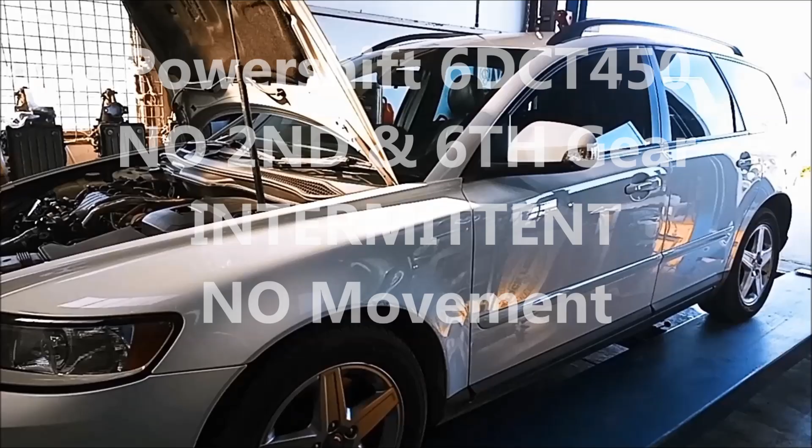G'day. Today we're doing a bit of work on a V50 Volvo 2010. Got the 6DCT450 transmission in it. Now there's issues with it.

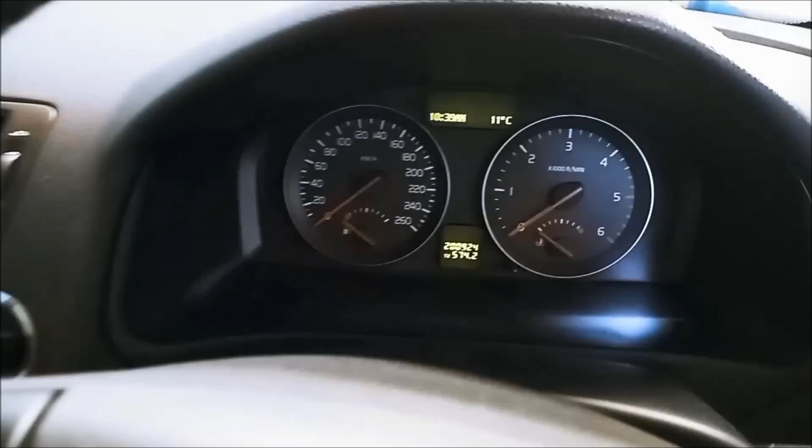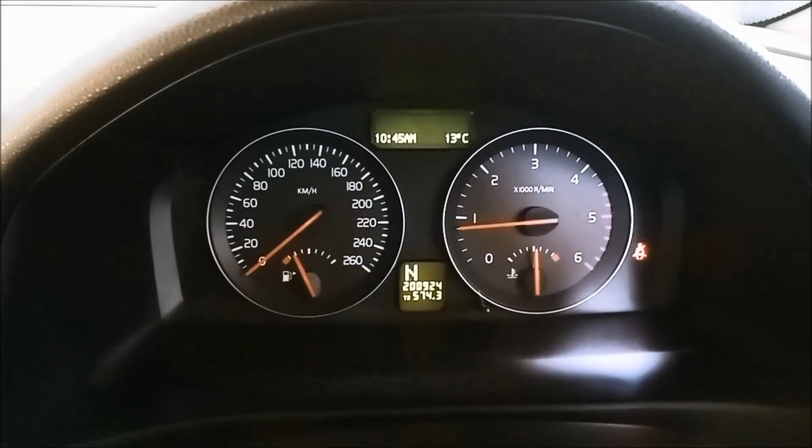It's going into neutral, neutralizing completely in all gears, including reverse. Seems to be better when it warms up. I've just had it out for a test run, and what I've noticed, manually selecting the gears, it's jumping second gear, going first to third, and there's no sixth gear. Also, sometimes if you give the selector a bit of a jiggle, it won't start in neutral. So I reckon the range sensor's probably contaminated as well. The limited function light comes on - it's gone now, but if you jiggle it through and get it to start in neutral, the light disappears. There's definitely an issue there.

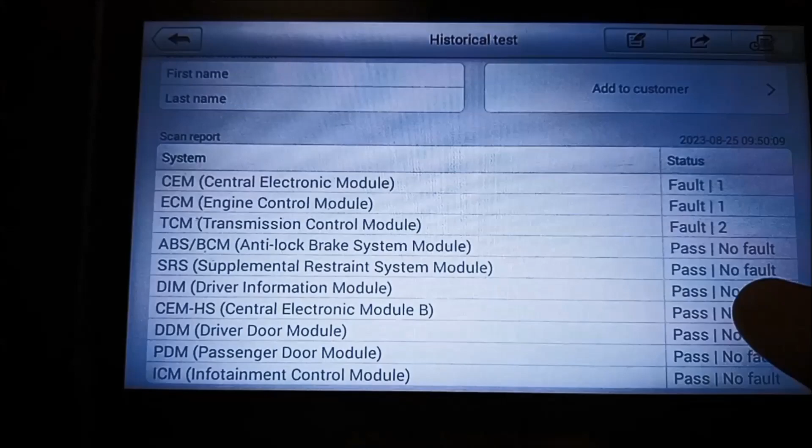And the scan there shows quite a few faults, six faults there. The multiplex solenoid has an intermittent fault. When it's intermittent, it can be heat related, it can also be contamination related. And it's jumping second gear and not going into top gear, or sixth.

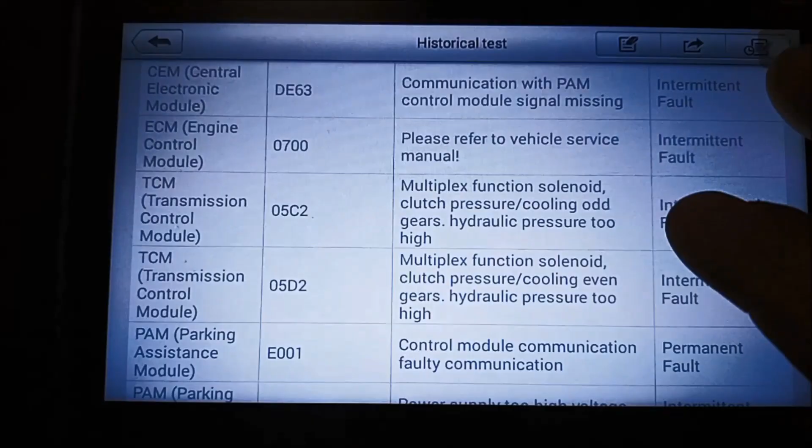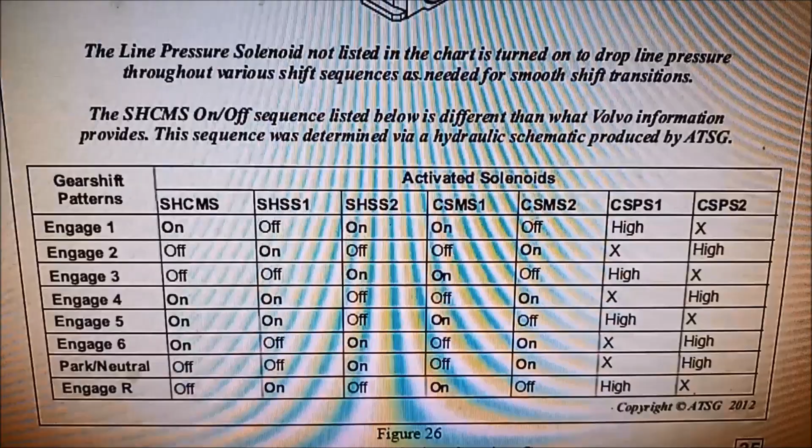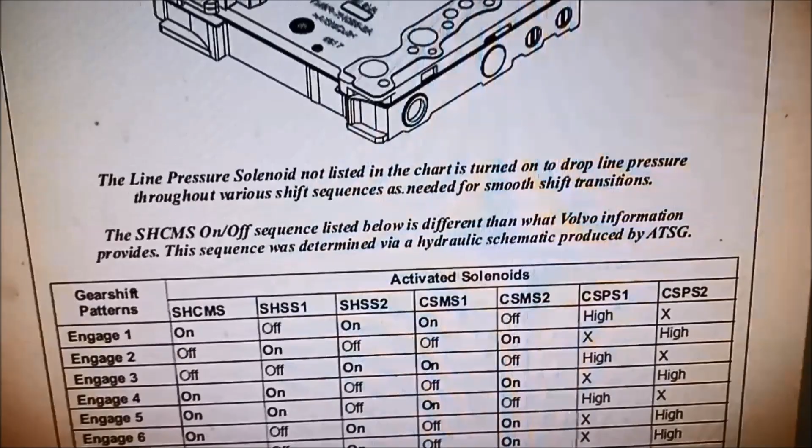So here we're on the ATSG manual for this. If we have a look down here, in second and sixth gear, we have two solenoids that are coming on, and one that's coming on high, and that's the CSMS2, or the clutch shift multiplex solenoid 2, and the CSPS2, the clutch shift pressure solenoid 2. They operate on even gears, which is what we've got, second and sixth. We've basically got two solenoids there, this one here and that one there that is playing up.

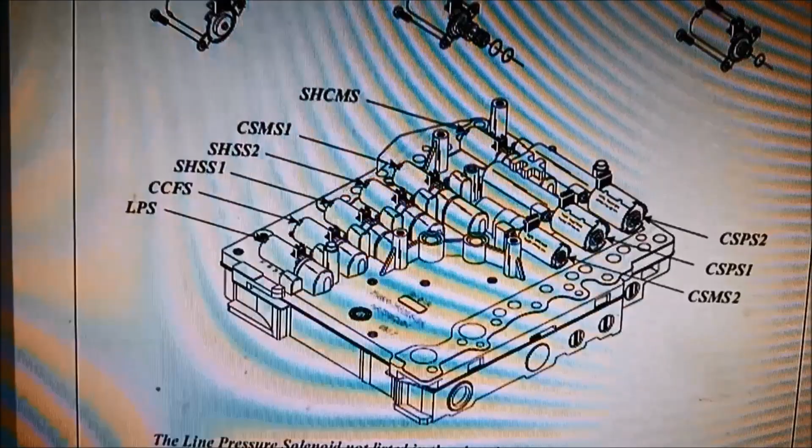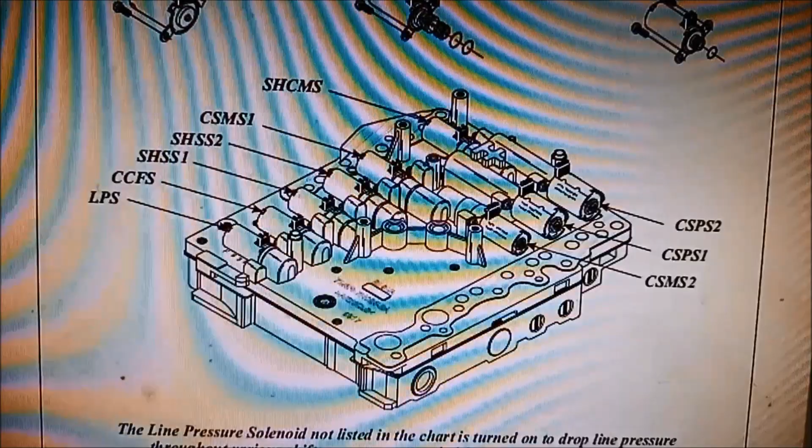So it's always a good idea to check as many solenoids as you can. If you're going to re-flush them out or demagnetize them, flush them out, test them, and make sure you warm them up as well - not with a heat gun. We have a little thermostatically controlled oven. You can put them in a plastic bag and warm them up in hot water, but a heat gun can sometimes damage the plastics on the solenoid. It's a good idea to warm them up to probably about 60 degrees and test, making sure the resistances are within spec.

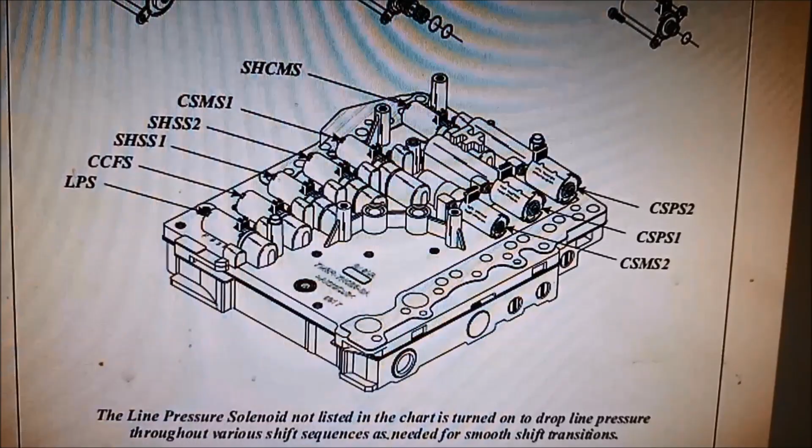Another issue with testing these solenoids is they don't operate only off voltage, they operate off varying the amperage, so that's another thing you have to keep in mind. But they definitely get contaminated, and internally they wear out as well. A leaking solenoid will not give you a fault code, but it'll give you issues. Generally, the computer can only sense an electrical fault if it's outside the parameters that have been set inside the computer there.

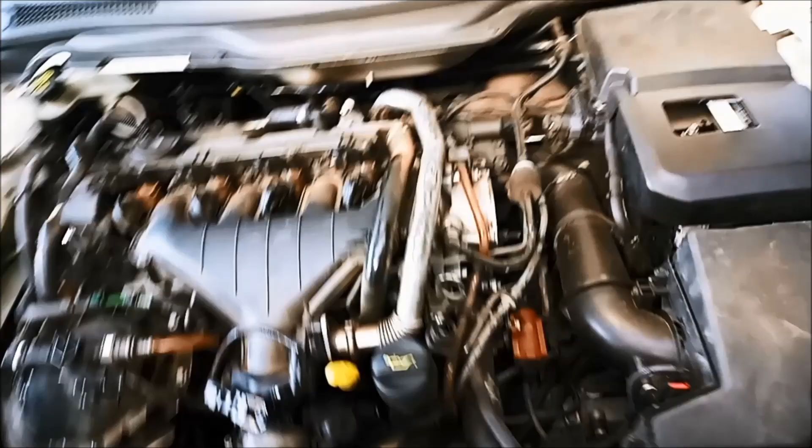So there are a few basic checks you need to do before you start any work on this. You can find that in the link I'll put in the description. Check that out. But we'll just drain the oil on this one and see if there are any bits of plastic in there. If there are any tiny bits of plastic, then it's not worth doing the solenoids or the range sensor - you need to pull the transmission out.

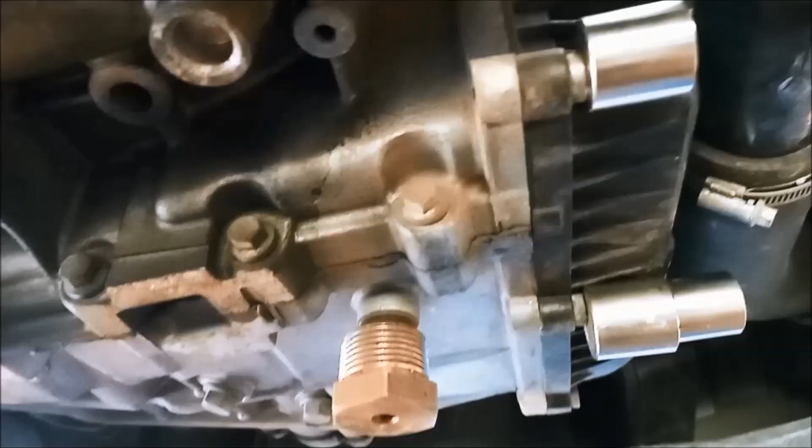Now another thing I didn't mention - we removed the cover on it and put a whole heap of magnets on it just to try and catch as much rubbish as it can before we start working on it. These are very strong neodymium magnets, very dangerous. Now just make a note, don't touch these plugs here, just the drain plugs, this one and this one.

So we'll do the rear one first, and we've got a little filter there that we're going to strain the oil through just to see if it catches any bits of plastic in there. These transmissions have different sections, that's why it's got a plug up here at the front and one at the back there.

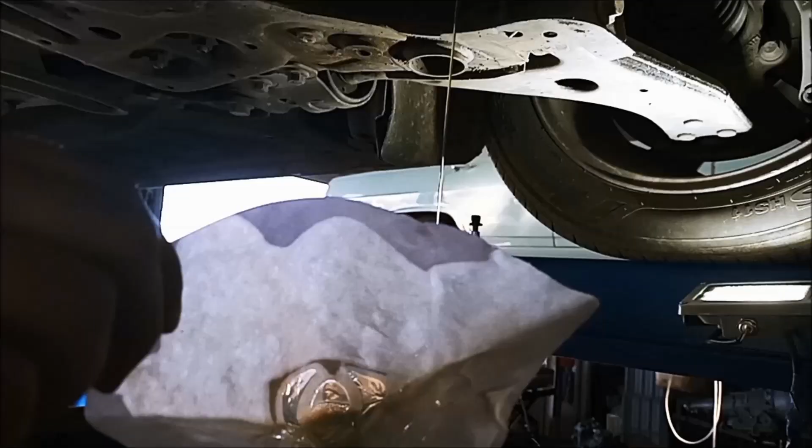So we've got no bits and pieces in the rear section there. You can see it's pretty clean. The oil's actually pretty clean too. And we'll do the same with the front section.

Let's have a peek at that one. Any bits in there? Oh, looks clean as well. So this job would warrant pulling the front cover off and replacing the solenoids and possibly the range sensor.

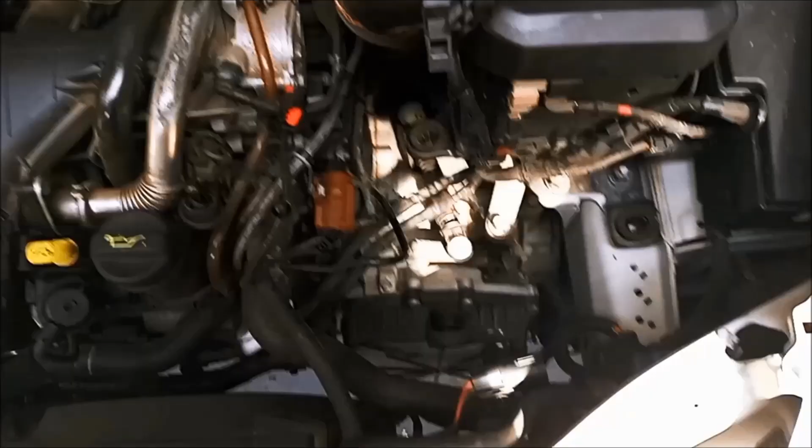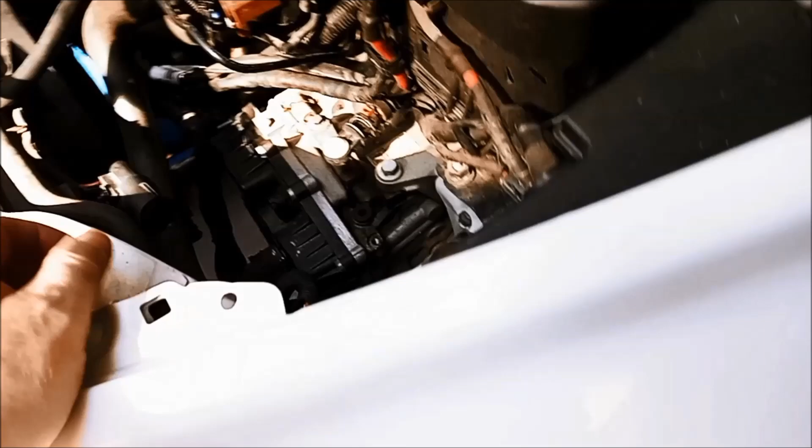So we're going to remove the front cover. We've removed the airbox, the plugs, the loom clips, just so you can move it. We've moved the thermo fan just to the side a little bit, up and to the side. And the big hose that goes from the intercooler along the bottom, and along the front of that cover there, will just be in your way. You can see that loom, we can just wire it up out of the way, like there.

We've probably got about 6 inches there, maybe 7, and we may have to pull the thermo fan right out if we can't get that valve body out. We've lifted it up probably a couple of inches and moved it to the right hand side of the vehicle, driver's side.

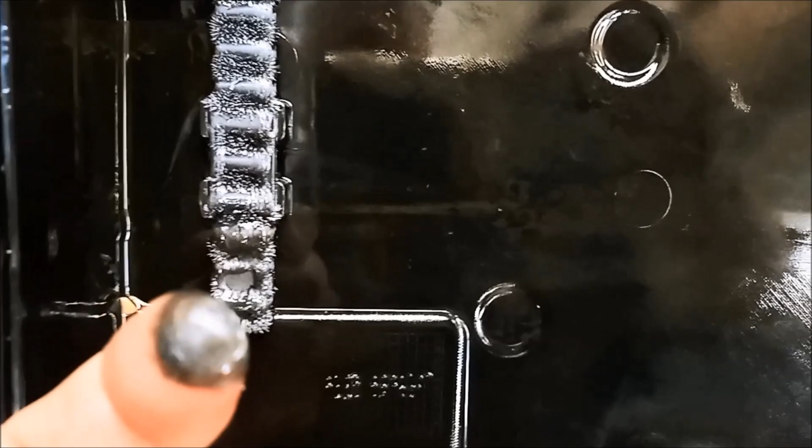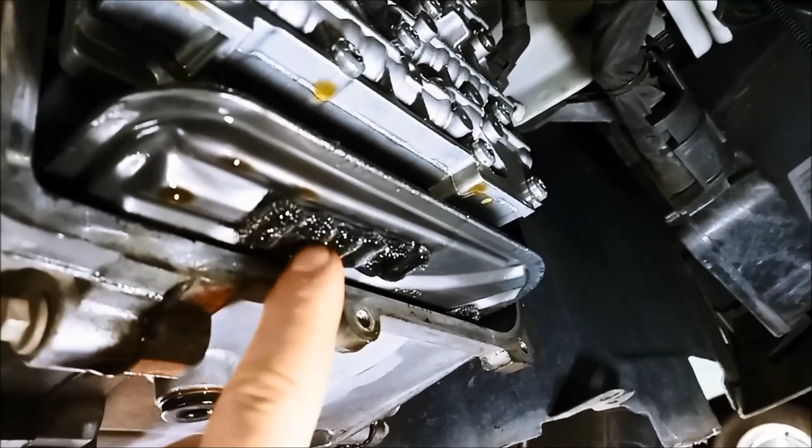There you go, you see the cover's off. You can see the magnet that's on the cover. All that stuff there will be stuck in the solenoids and on the sensors. You can see there's one on the filter there, and there's another one over here. Can't really see it, but they're thoroughly covered in that muck as well. Once the magnet becomes covered like that, it can't work anymore.

So the next place that's going to end up is on your solenoids, on the back side of the valve body. So we'll just take that valve body out. The top 4 bolts on the left hand side of the vehicle, and all these ones down the right hand side, and then you'll be able to slide that out. Don't forget the range sensor up there as well.

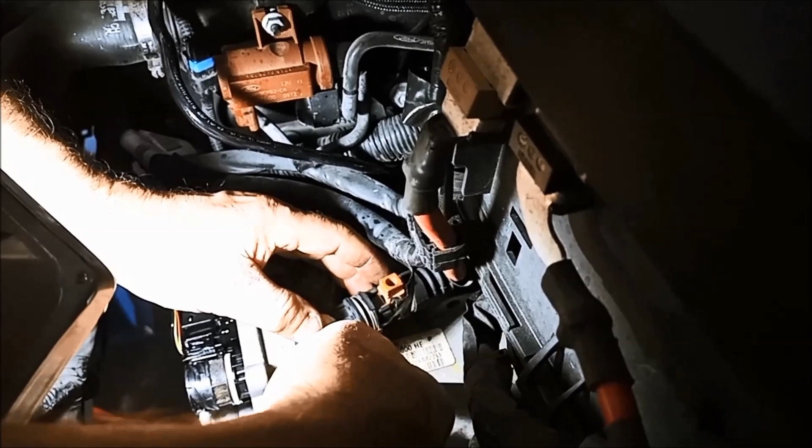There's a couple of bolts on there and the plug, and there's also a pin that you need to pull out. To get this off, you've got to push this little spring-loaded thing there, lift that little plastic bit off, up, and then you can get a screwdriver and just pop it off, and it'll just pop off the little selector there.

So now we're just aligning that little tool that we made in another video. What we need to do is select drive. So we're in park, reverse, neutral, drive. And if you watch the other video, you'll notice there's a little cam like that, and a little spring loaded bit just to keep the teeth on tension.

So what that means is when you push this in, you just need to - a little bit hard to see, not much room - flex that without going out of gear. So you just need to flex without going into the next notch. Just flex it just so you can get that tool in.

There we go, and that's just dropped down. I know we're in the right position there. So now I'll just mark where the D position is, so I know when I'm reassembling it, it'll go back in the right spot. Like I mentioned, sometimes it has to line up with the D, and sometimes it's one notch past the D, depending on the vehicle.

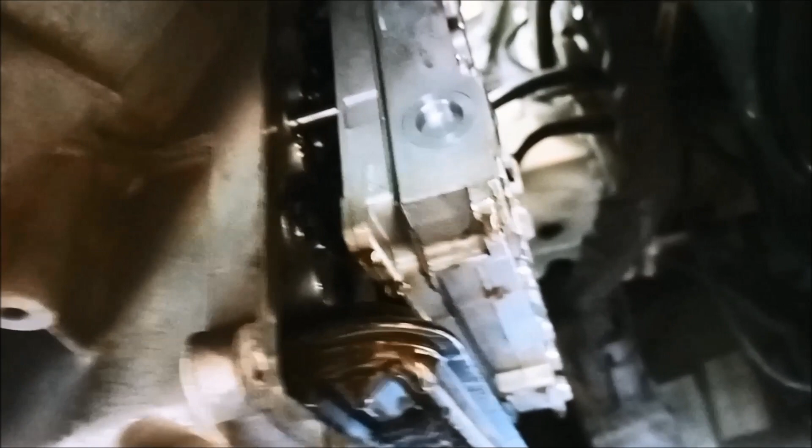Now we've taken the top 4 bolts on the left hand side of the vehicle off, that are down the side, the top 4 down that side, and all the ones from the top to the bottom on the right hand side. Sometimes you need to just pry it - just make sure you don't damage anything, and make sure you've removed those 2 bolts on that range sensor or you'll damage the range sensor.

Just let that drain out a little bit and then we can just slide it off, and it's located on 2 guide pins. There we go, so you can get it out.

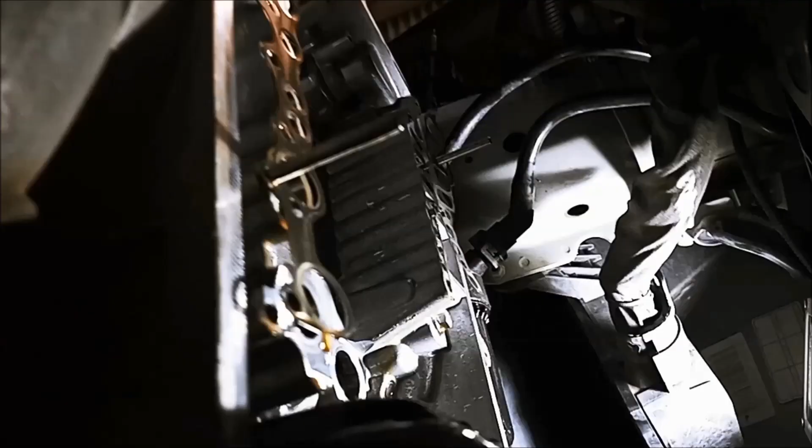It is a tight fit, especially with the loom, but if you've got an assistant or a bit of wire, you can just tie that loom out of the way a bit, or you can undo that bolt there and this little box will just move to the side as well, and then that loom will be able to move out of the way a bit.

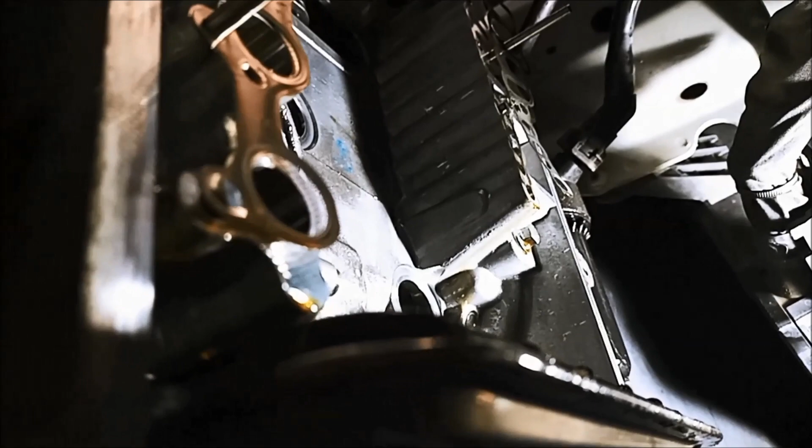You can see the 2 guide pins, and you can also see these metal gaskets there. It's a little hard to see from here. I'll see if I can hold it in there, but where those little sensors are, there's a little shift fork. You'll see that the shift forks are thoroughly covered in that fine metallic debris, like on that magnet there.

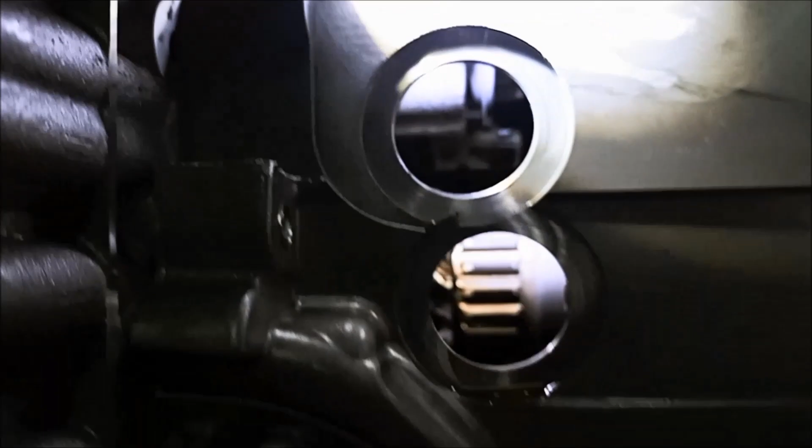So you can see that one there, there's a little fork there. There's one in there, a bit hard to see. There, and then down through here. You see that little plastic end there, and there's another one over in here. So they all need to be cleaned. You can just blow them out.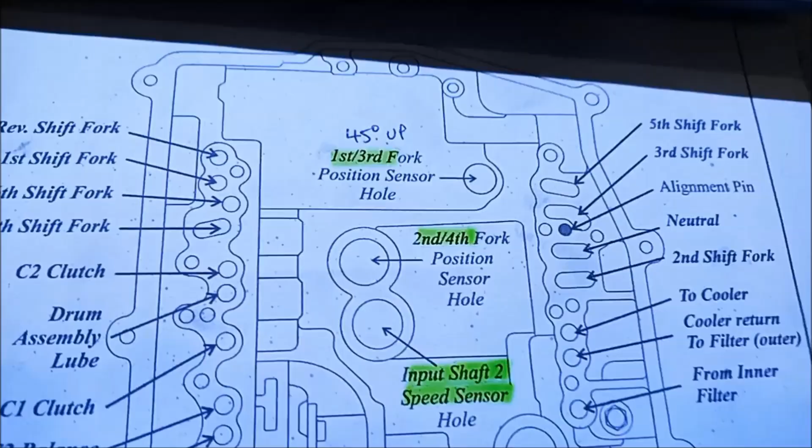And here we are on the ATSG manual. I've just marked they're about 45 degrees. If you look up, you'll see them: the 1-3 fork position sensor, the 2-4, the input shaft 2 speed sensor, the output shaft 2 speed sensor, and it's also got the 6th and neutral fork and the 5th and reverse fork.

So it's a good idea to get in there and just blow it out with air. Just blow it, and you'll see there's all metallic fuzz on those sensors.

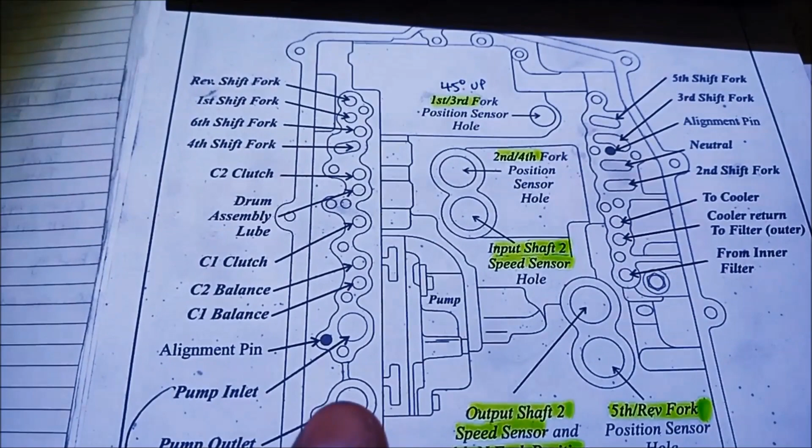Another thing you can do - you can check out this video here on the pump inlet - you can push a hose in there and just pump oil through there, making sure it's DCT oil. Blowing it with air won't clean that as effectively; you need some sort of medium to actually carry the rubbish out, so oil's probably the best idea. It'll also reverse flush the filter that's located at the bottom here, along here.

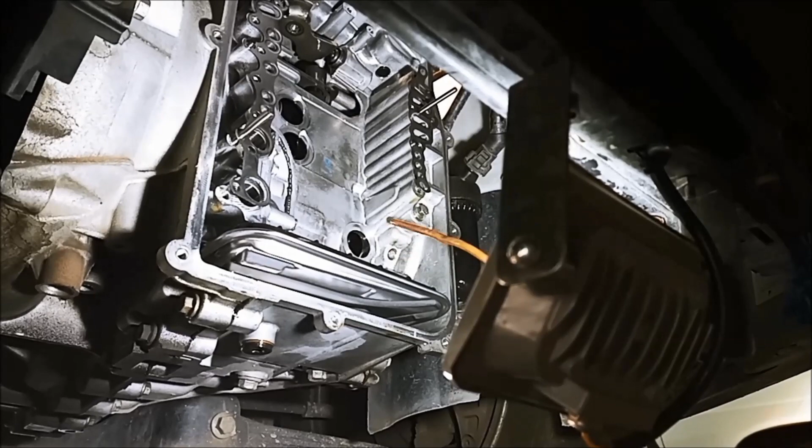So we'll just blow those sensors out best as we can. This bottom one's pointing... got it back in.

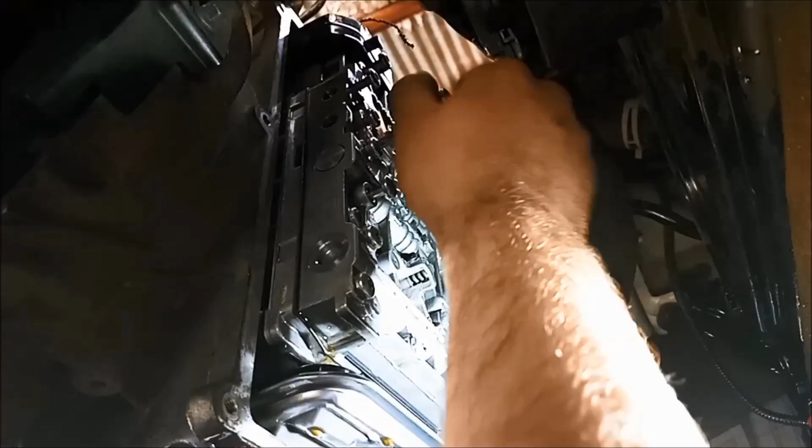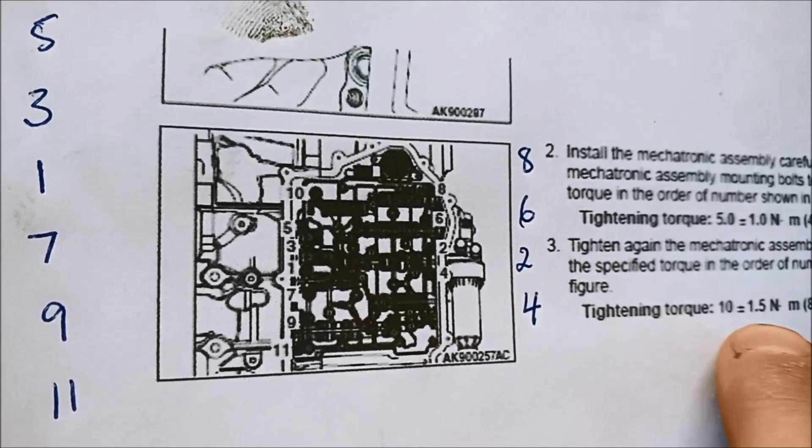Place the gaskets, solenoids, and there is a sequence of tightening that - 5 Newton metre to start with. You can see those numbers there, but I've put them on the sheet there: 1, 2, 3, 4, 5, 6, 7, 8, 9, 10, 11. In that sequence, you want to try and get it tightened up evenly, sort of like a head, and don't over torque them. Start off with 5 Newton metre and then final torque of 10 to 11.5 Newton metre. If you put a new gasket on, you can go 10. If you reuse your old gaskets, go a little bit extra.

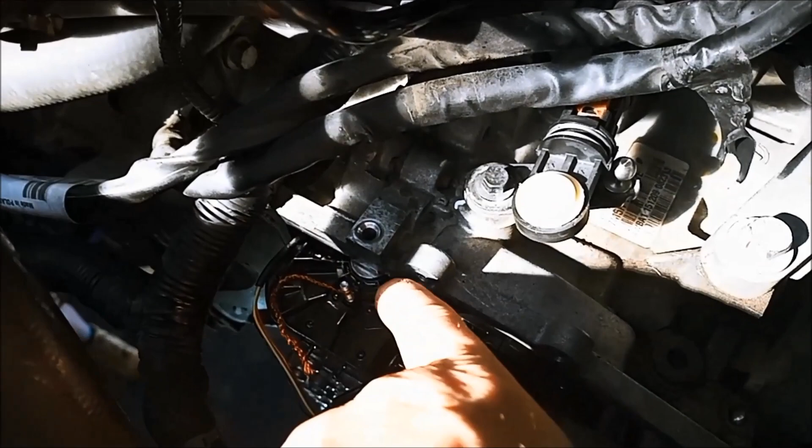And now hopefully your little tool there hasn't fallen out. It's still on the same mark there - see the liquid paper mark. And now we can put the pin back in.

And that goes through the range sensor. Now sometimes you have to just, because those pins are precision fit, you need to let it sort of find its own way through. Don't force it through, and definitely don't tap it through with a hammer or something like that.

After you've got it all back together, just reconfirm that the position is the same and your little pinhole is lined up. Bolts are back in, weave that little cable there. Make sure you push the plug in until you hear the click, then try and pull it out.

That's all good. And you should be able to feel that little step of that going through just when you flex the selector there. So you can pull it out a tiny bit, probably about 1 mil, and then you should be able to feel it go on that little spring steel tensioner that sort of keeps the teeth in mesh. If you don't line that up properly, then it's not going to work properly.

Once you're happy with how that's all aligned, you might notice that I've got this little bit of wire there, and I deliberately have that on there. The reason being is that you don't want to put that cover on while that's still in there. Don't ask me how I know that, but that's why I've left that wire on there, so it gives you an indicator that you've forgotten to pull that pin out. So you can pull that out now.

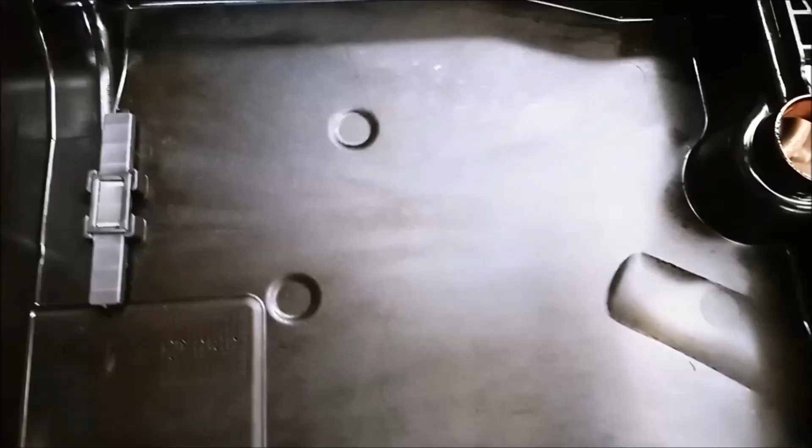Pan's all nice and clean, or the front cover, magnets all nice and clean. Smear a little bit of oil or assembly gel on there just so it goes over that plug a little bit easier. So we've got the intercooler pipe back on. Make sure you do the clamp up that's under there. Covers back on. Drain plugs are tightened up.

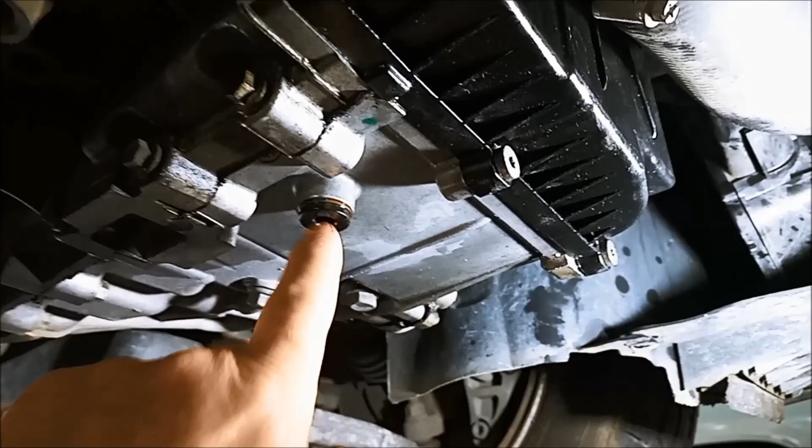We've replaced the cartridge and the cartridge housing on the cooling line, the external filter. The internal filter we've reverse flushed through that port I showed. Covers all on. Selector back into park. That just clicks on like that. Push that little red tang down like that. There we go, done.

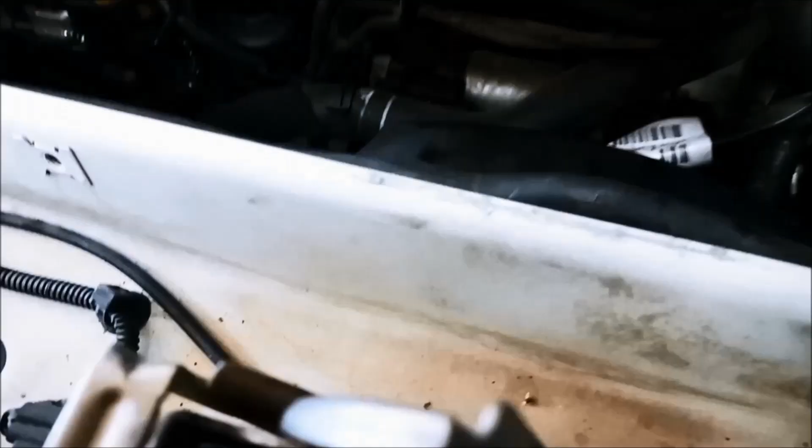Put these hoses back on over here. And the air box, we're going to fill it through here, and we're going to start with about 5.5 litres.

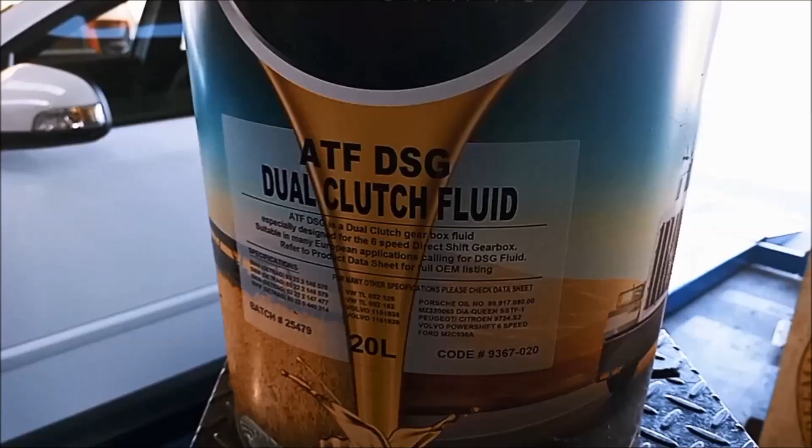And we're putting some Tritech brand DSG or DCT fluid. You can see it suits the Volvo Powershift 6-speed as well as the Ford, BMW, Peugeot, etc, Porsche even. Or you can also use the Penrite here in Australia, they have an equivalent.

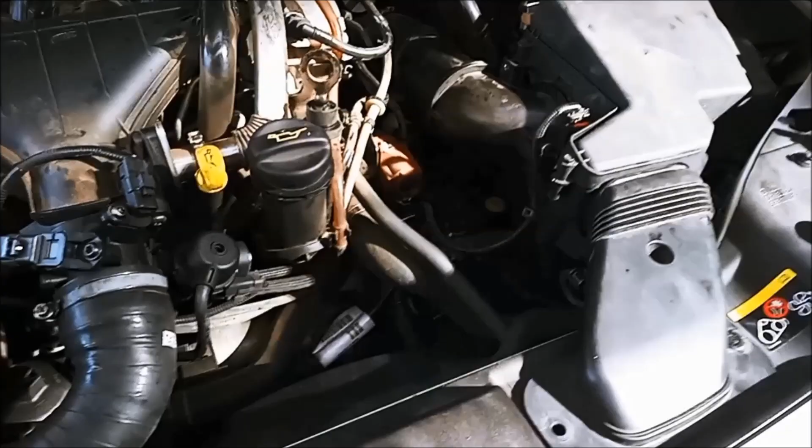Airbox back on, all the plugs are in, we've filled it up. We might need to take this airbox off again just to top it up, just check the oil level. 5.5, 6 litres should be enough, but there's a little plug just next to the axle there on the left hand side of the vehicle.

Rightio, start it. Glow plugs.

There's like a bit of a bearing noise here, idler bearing or something along those lines. Got movement, we'll go reverse. So there we go, just on a road test.

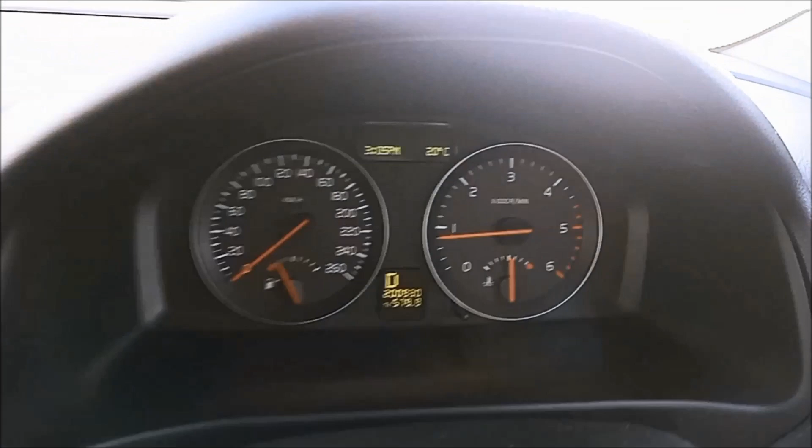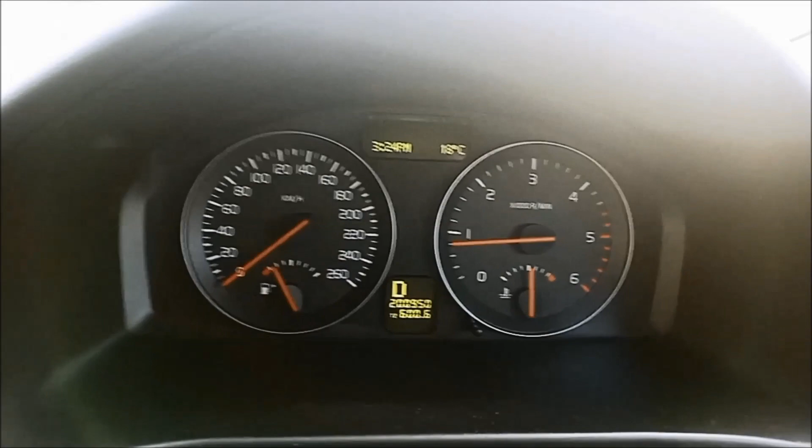It was a little bit rough going through all the gears, but we've got 2nd and 6th gear now. So I've probably done an extra 15-20 Ks, stop starting, and it's shifting through nice and smoothly now. It was a little bit harsh probably the first 10 kilometres or so, but that's all come good. I suppose the fluid's circulated right through now as well. And also the computer needs to relearn the new electrical parameters in the solenoids and on the sensors.

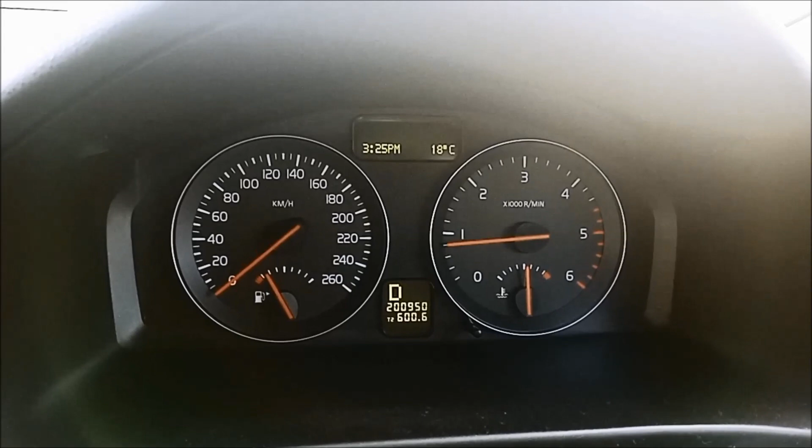So we've just got the live data there. You can see the shifts and the preparation of the shift.

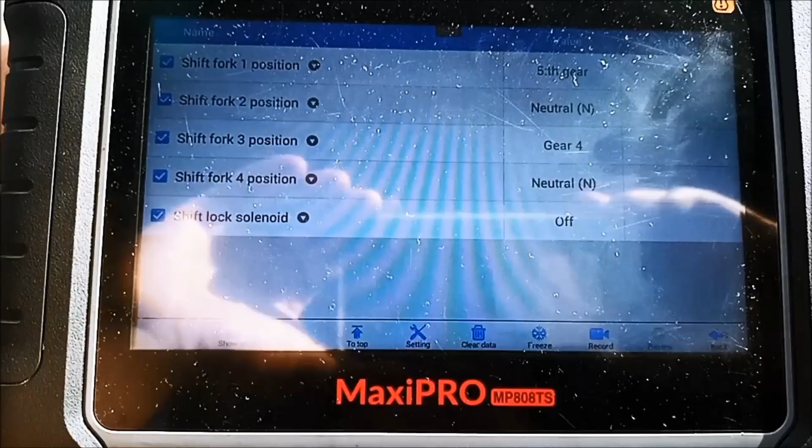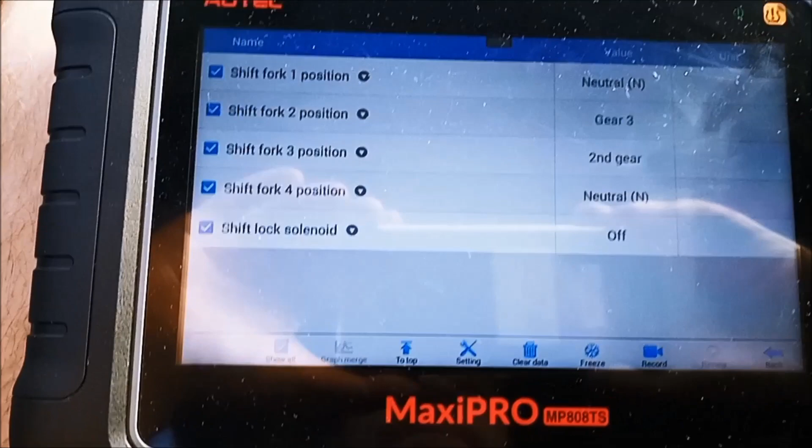Showing 2nd. And you've got to be doing under 35 to go into 1st. And going back up, we've got 2nd now. We didn't have 2nd and 6th gear before.

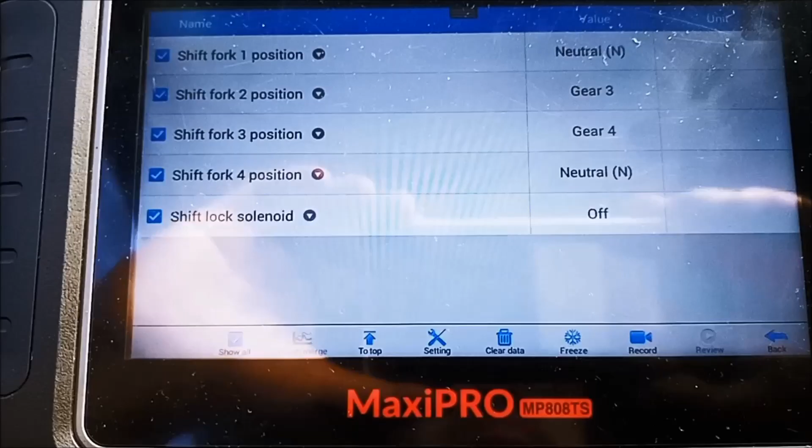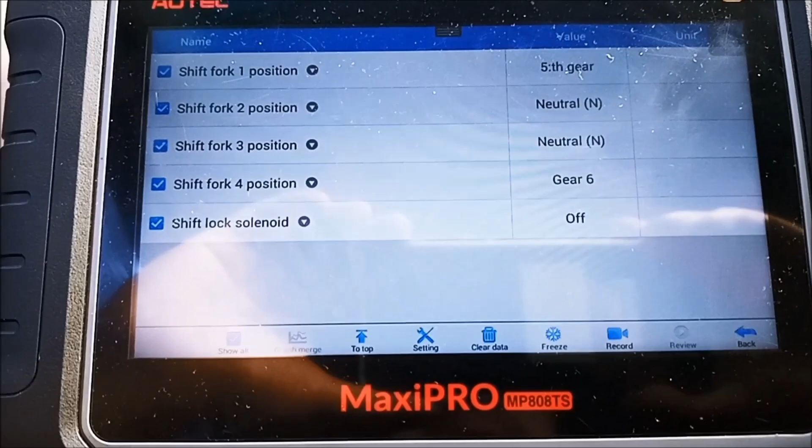5th and 6th. Oh no, does that show it's in 6th now? Yeah. Oh, back in drive again.

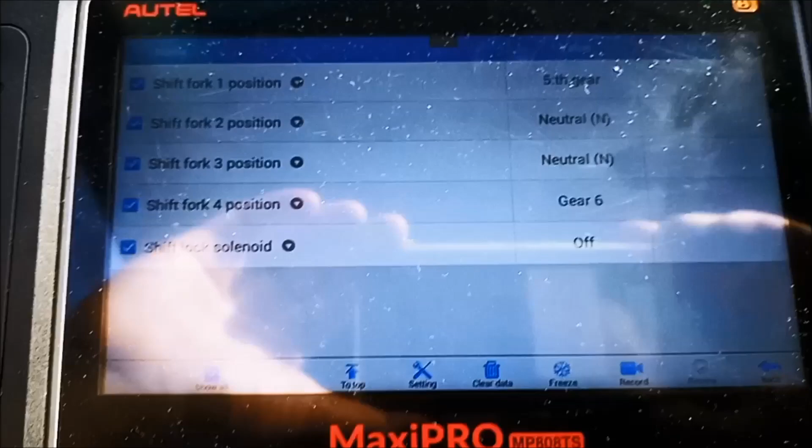So it looks like flushing it out, flushing the solenoids has improved it. So far anyway, there was a fair bit of metal in there.

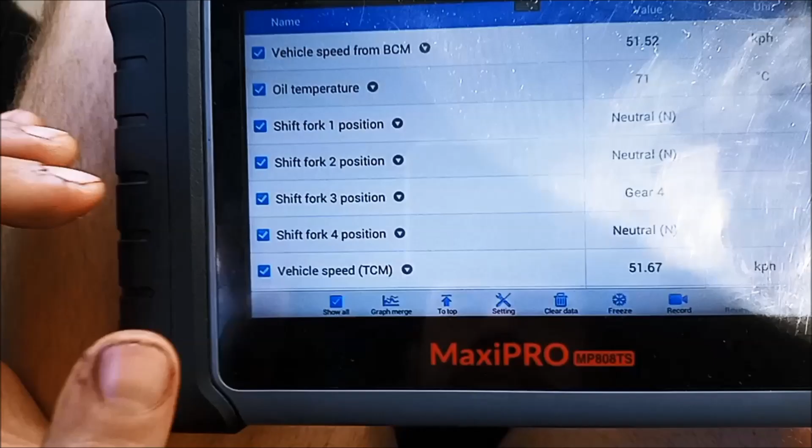We're on 70 degrees. Yeah, check the oil level.

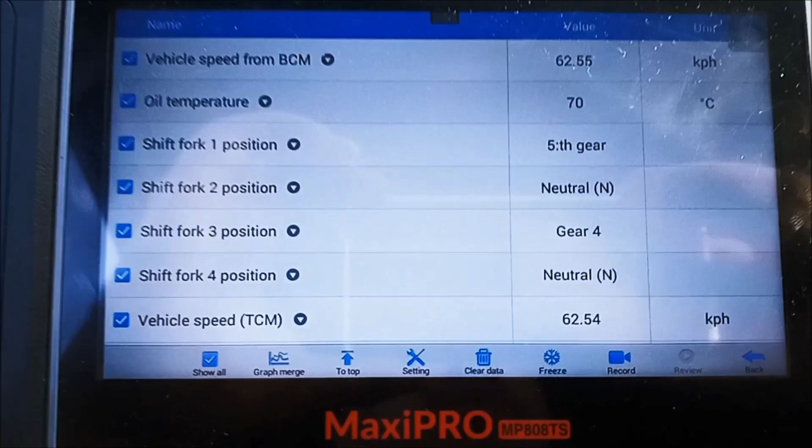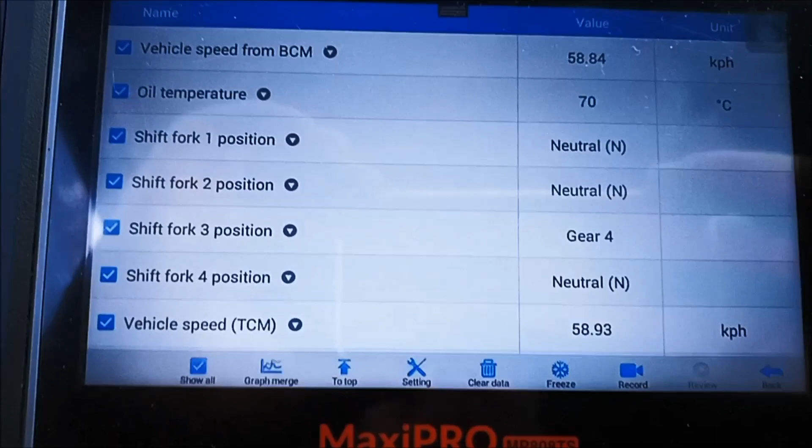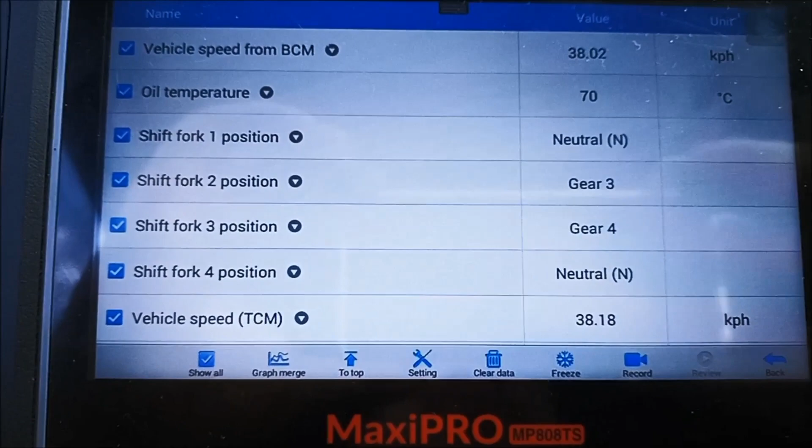That downshifted there. Yeah, we're in 4th. Preparing into third, third. Preparing second, second. Third.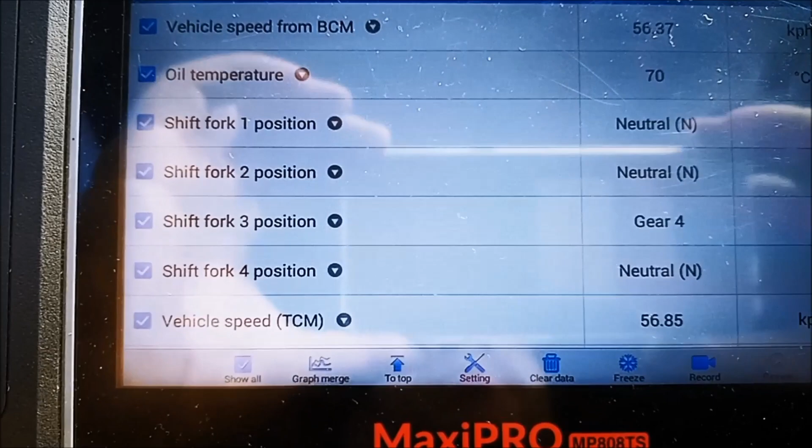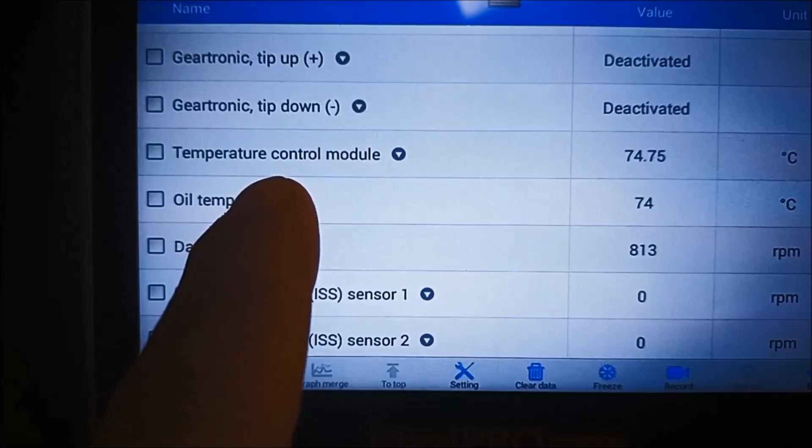So we've managed to get it up to 75 degrees, and the reason why you have to do that is to make sure you've got no air locks anywhere in the transmission hydraulic system. It'll bleed all the air out, and then what we do is we've got to get it between 35 and 45 degrees without the motor running.

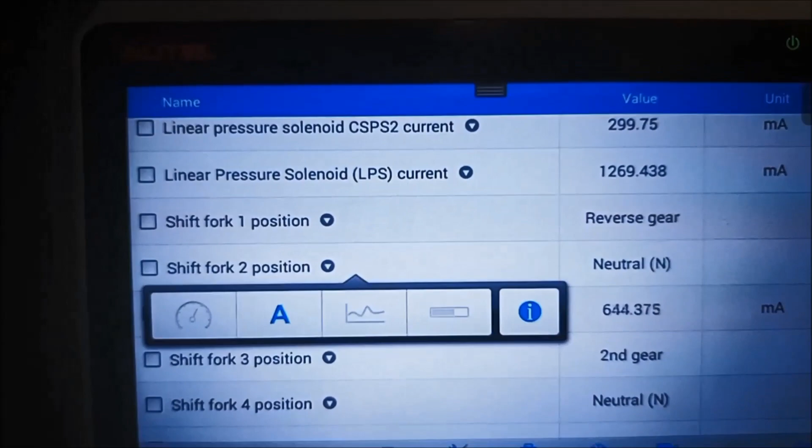And then we check it over here, I'll show you. Now to check the fluid level, you've got to let it cool down to between 35 and 45 degrees with the motor not running. And there's a little plug here just behind the left hand axle or CV joint. You take that off and it should be just trickling out of there, nice thin stream.

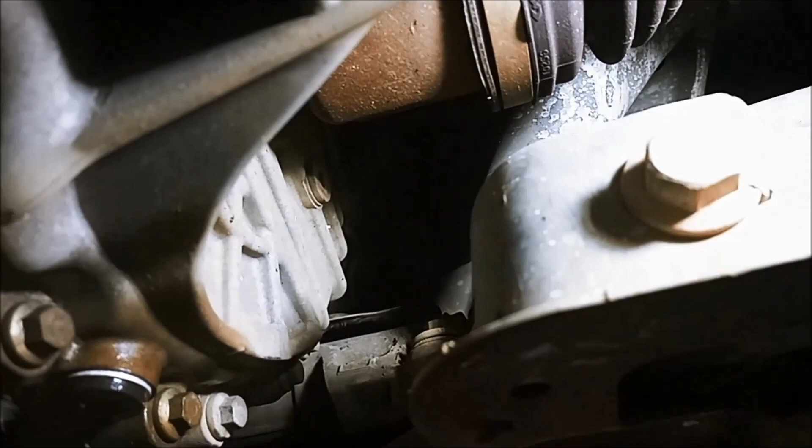The reason why we warm it right up is to purge any air out of the hydraulic system. So we're down to 40 degrees, which is the mid-range.

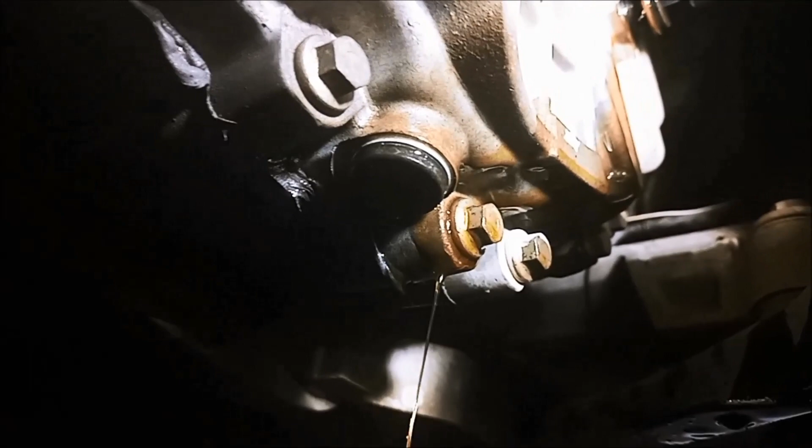And we need a little bit more oil in there. Now you can fill it through there, you can, but you've got to make sure when it gets down to temperature, you've got to go through the gears, start it up, go through the gears, and then turn it off. We'll put the plug back in.

Just have to put the stone guard back on now and just double check our work. Make sure we've tightened everything up and pushed all the plugs in.